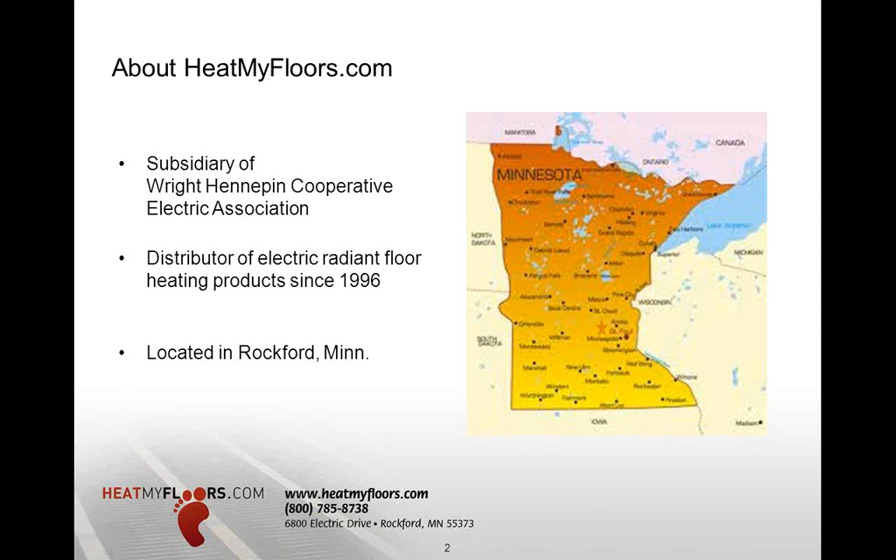A little bit about me. My name is Andy Hoffman. Some of my interests, I like to do a little snowboarding, biking, hunting, traveling. My girlfriend and I do a lot of traveling. I actually started with Wright Hennepin Electric in October of last year, so I'm fairly new, but my primary focus since I've been here has been specifically on this product for about the last 6 months or so.

So while I don't have quite the knowledge base that Dennis does, I feel pretty well versed in the product. And I didn't actually know it existed beforehand. I had done a lot of college jobs pouring concrete, roofing, some landscaping, things like that, so you see a lot of products out there. To come in here and see this STEP Warmfloor product is pretty unique, and I was pretty surprised there was something like this out there that existed. We see a lot of that at home shows too that we do. People come up to us and say they don't really know about it.

A little bit about the product, just to recap, or for some of you that aren't familiar with it: it's a low voltage, 24 volt AC or DC, semiconductor plastic radiant heating element. It's very reliable, comes with a 20-year warranty, 10 years on the transformers, and 2 on the controls. It's a self-regulating element, so it's very efficient, 2 times more efficient than cable, and even more efficient than hydronic systems. It's very thin and flexible. The widths come in either 12 inches or 9 inches, and the thickness is only 3/64 of an inch thick, which makes it ideal for remodels and retrofit applications, especially under carpet with its thin profile.

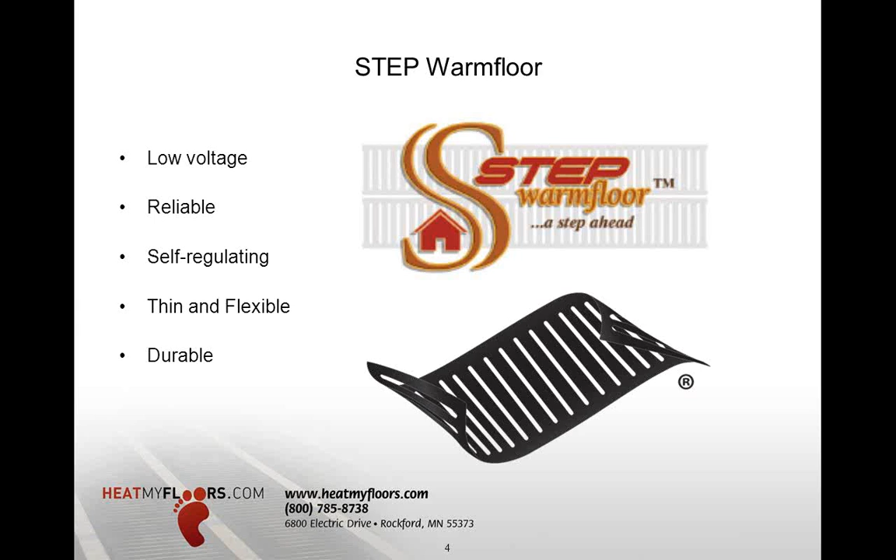And it's also very durable. You can nail and staple through the product without causing it to fail, and it has a lot of different applications, including snow melt, roof melt, primary or supplemental heat, things like that.

Taking a look at some comparison, STEP Warmfloor versus electric floor heating cables, which you typically find out there, you'll find that a lot of other products aren't going to be suitable under carpet. There's a lot of limitations with them, as far as floor temp goes, you'll typically want to get no hotter than 85 degrees, and a lot of those cable or radiant systems out there will get hotter than that because they're not covering as much area, so it takes a lot more energy to heat the same amount of space. And of course, you're going to run into that risk of overheating as well.

Typically we find carpet is going to be in a larger area, more likely a living room or a bedroom, and you're going to have large, heavy objects like dressers, couches, entertainment stands. When you put some of these heavier objects over those cable systems, they're obviously going to get a lot hotter than areas that don't have objects over them, and you have that potential for burnout. Where the STEP Warmfloor, because it does self-regulate, once it heats up to that 80, 82 degrees or so, it's physically not going to get any hotter than that. It can't, so we don't have any risk of that.

Also, with operating costs, if you look at putting cable in a larger system, you're going to find that it's usually quite expensive to operate. Where STEP Warmfloor, we typically say around 60 to 80 cents a square foot for the heating season, so it's very efficient as far as operating costs.

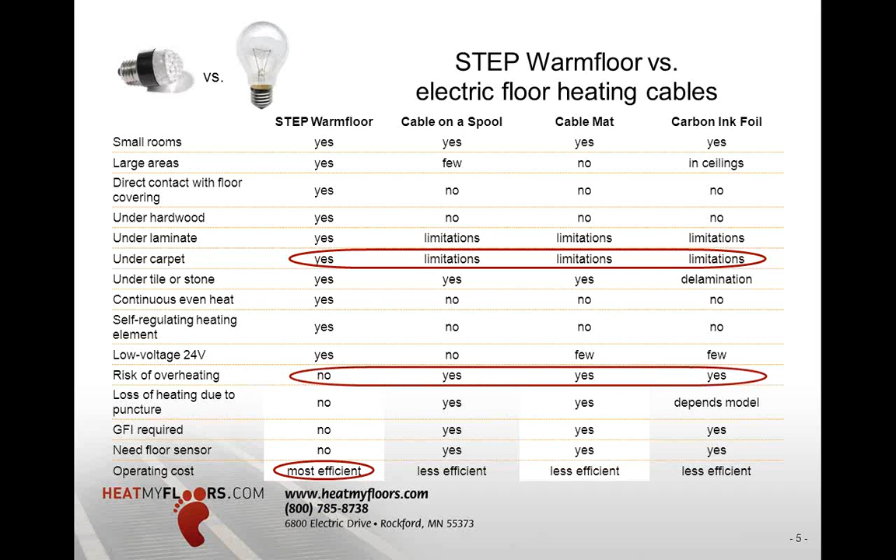Some notes on carpet here. It's naturally warm and acts as an insulator, so it's used a lot over concrete because concrete's naturally cool. To take that cool off the concrete floor, we see a lot of carpet go down, and it does help create efficiency for the house in general because it insulates. We've noticed that can cause problems on the radiant heating side of things, as far as preventing heat from coming through, so we're going to cover some different ways we can get around that.

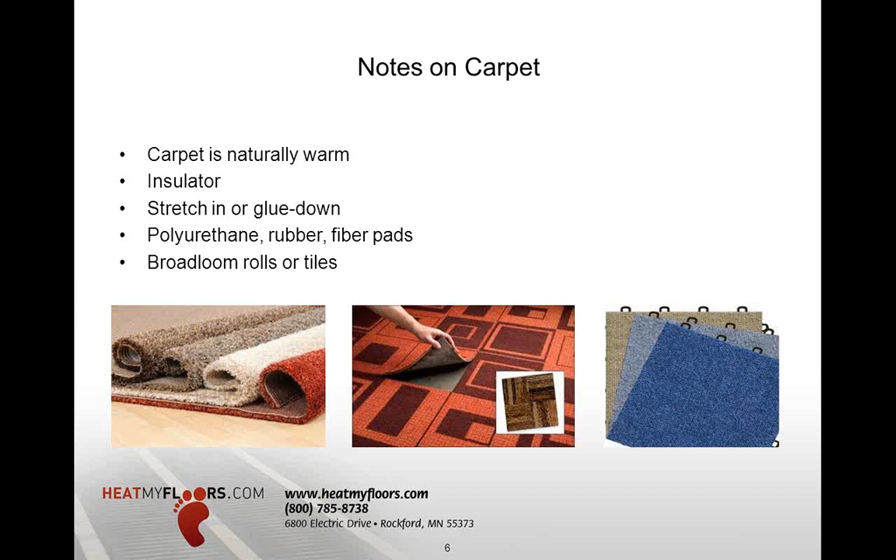One thing you've probably heard about with carpet is VOCs and off-gassing. VOC stands for volatile organic compounds, found in furniture, plastics, new cars, clothing, carpet. You can smell that new car smell, if you will - that's the chemicals evaporating from the material. Typically with carpet it's actually fairly low for off-gassing, but it's something to keep in mind.

Usually we see it decrease fairly significantly after several months, and you want to make sure you ventilate at least 72 hours after installation, and continue to ventilate for several weeks if you can - blowing fans around, or opening a window, things like that, to get some fresh air. Radiant systems can add to this effect - with the heat, evaporation can increase. So it's not a bad idea, after you get the carpet down, to let it sit and ventilate for a few days or a few hours before you fire up the system.

If you go with CRI, the Carpet and Rug Institute, they have a green label program where they label pads and carpets with this green label, signifying that the product is low in off-gassing or VOCs. So you want to keep an eye out for those.

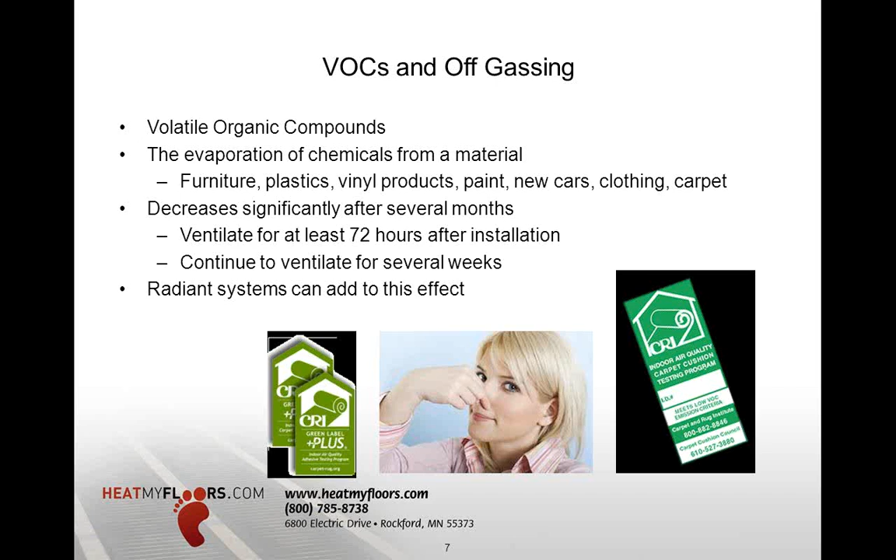Now, with selecting a proper pad or cushion - if we look at polyurethane pads, typically they come in three forms: prime, bonded, or froth. You'll want to stay away from prime or bonded pads. You'll see a lot of bonded pads out there - they're the most common. But what you'll find is they have higher R values, with a lot of air and glue in them, and over time, once those pads wear down, they really just become an insulation barrier preventing heat from passing through. Froth is regarded as one of the better pads in the industry, even outside of radiant heat comparisons.

Froth does a nice job of laterally dispersing the heat. It's got a nice density and is higher quality, which typically lasts longer too. That allows for even wider spacing of the elements as well, because it has that nice density where it disperses the heat outwards.

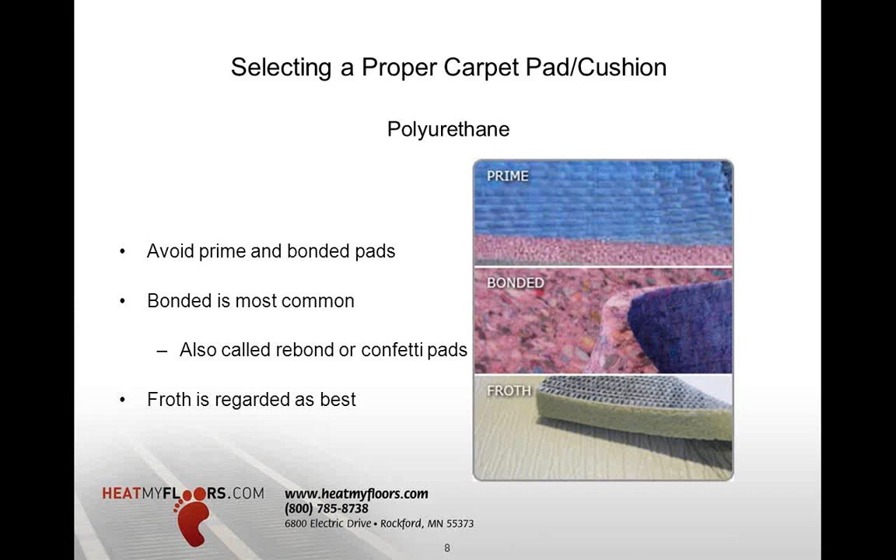Another type: slab rubber and waffle pads out there. Typically we find slab works better than waffled, and that has to do with the contact the elements can make with the pad. With waffle pads, you're going to have a lot of air in there that acts as a natural insulator and prevents some of that heat from radiating through, whereas the more contact we can have with the element to the pad, the better the system is going to perform.

Typically we want to say thinner is better in general for that. If you do find a pad, we're always looking for lower R values, and that will create tighter spacing of the elements, because typically with a lower R value, it's not going to disperse the heat as well. So while it's nice to have that, you still need some sort of mass to disperse that heat and get it in direct contact with the elements.

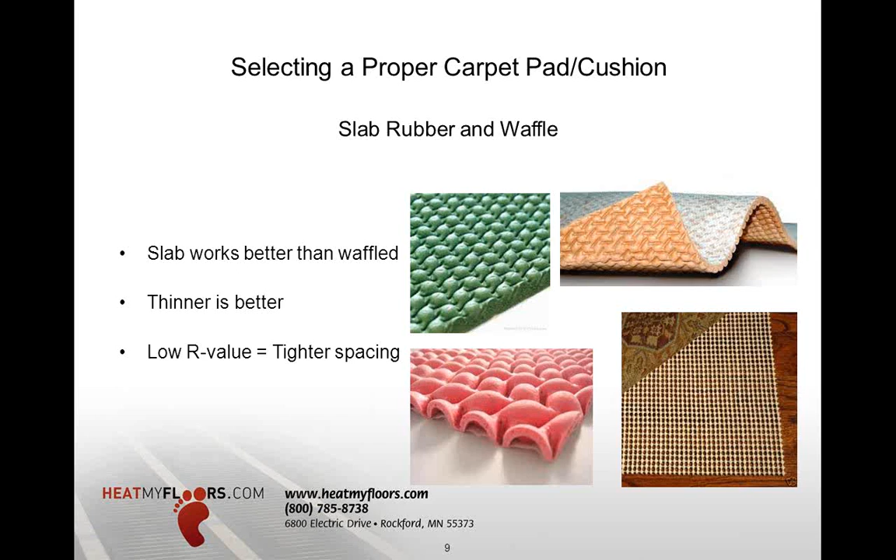However, on the flip side of that, because it is so thin and lacks that density, if you do look at putting the system embedded in cement, thin set, or self-leveler, you would actually want to consider the fiber pad, because it has that thinness, that low density, low R value that you're looking for. So typically, if you do some research on radiant heat, as a lot of systems are embedded in cement, they will actually recommend fiber pads.

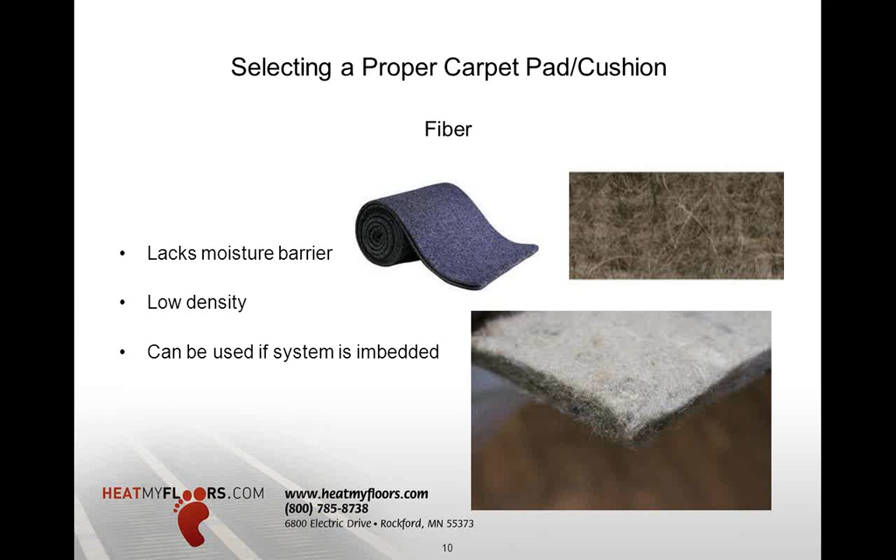But for STEP Warmfloor, you will want to avoid them, as we are looking for a moisture barrier. You can see from that image up there, if you spill something on a pad without that moisture barrier, it's going to go right down to the subfloor, which is typically where we're going to have those STEP Warmfloor elements. So if you spill a pop or have a pet accident, things that leak through, once you heat some of that, it's probably not going to smell the best.

And you always have the potential for shorting out the elements, which is okay - you might trip a breaker, things like that. Once it dries, go kick it back on. But just in general, you'll always want to look for that moisture barrier if you're not embedding the elements.

You also want to look for that low R value and a higher density pad, and consider the thickness you're working with and what kind of room you have. Chart below is just a quick rundown of some of the typical pads you want to look at, some of the R values and thickness there. Obviously, the thinner and the lower R value you can get, the better off you're going to be with that.

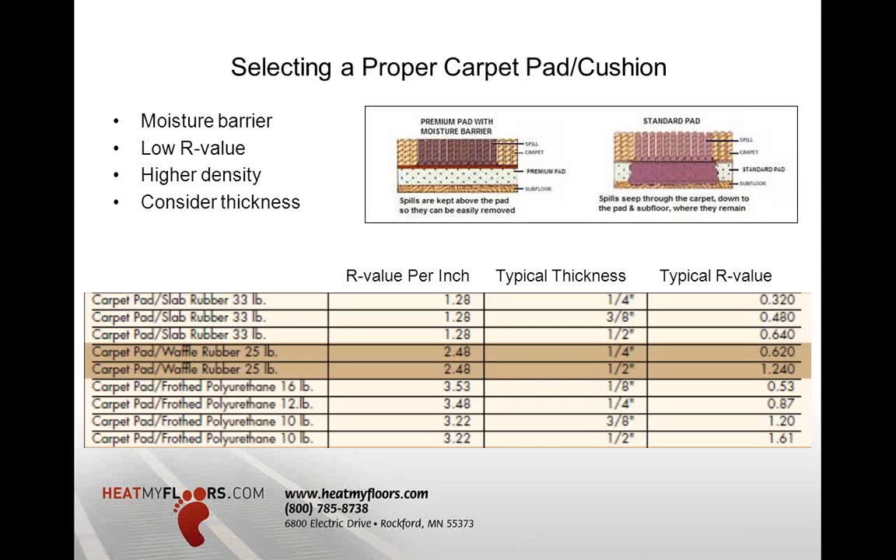So what we recommend, as far as the manufacturer recommends, Healthier Choice and Sponge Cushion are two brands - we'll go into those coming up here too. But you want to look for rubber-backed pads, that moisture barrier again, and froth pads as well. Those always do real well, and look for low VOCs and off-gassing.

What you will want to avoid is that prime or the bonded or rebond polyurethane pads. One thing I forgot to mention with those pads as well, a lot of those bonded pads do have adhesives in them, and over time that can be detrimental to the STEP Warmfloor element, cause it not to perform as well.

Of course, you want to avoid pads with the higher R value. The fiber pads, we kind of went over that, and obviously anything with a high VOC content and off-gassing. The main thing is just to always check with your retailer or manufacturer to make sure that the pad and the carpet you choose are rated for radiant. If you don't know, or if they don't know, feel free to get in touch with us. If we don't know, we'll find the answer.

We'll find it out for you. But that's really the main thing, is to just make sure what you're using is rated for radiant. Most of them are, but there are some out there that aren't.

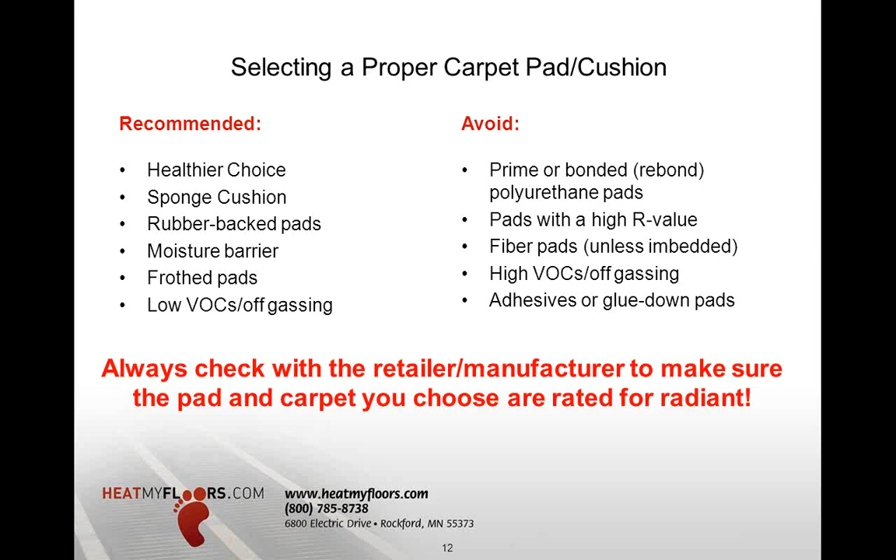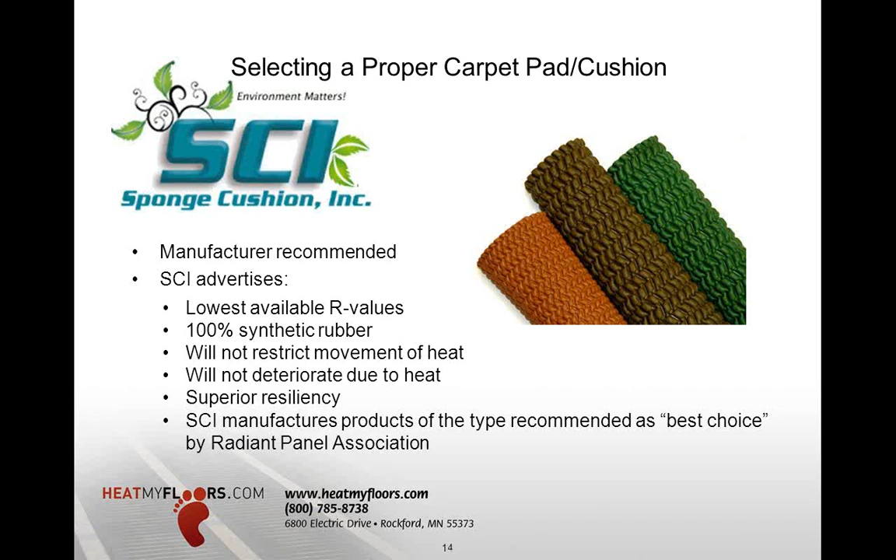The other one, Sponge Cushion, is manufacturer recommended, and they advertise right on their website. They have the lowest available R values that you can find. These are 100% synthetic rubber, and also do a nice job of dispersing the heat. And you'll find the RPA, the Radiant Panel Association, does recommend typically these rubber pads to be the best choice to use over radiant floors.

So when you're looking at carpeting, you'll want to also think thin with this as well. Combining the carpet and the pad, you'll want to be under an R value of 2.5 if you can. If you combine the R value of the pad on top of the R value of the carpet, it's always nice to be below that mark. And if you are looking for a thicker carpet, it might be nice to consider a thinner pad, or vice versa. If you're going to have a thinner carpet, you can go with that thicker pad.

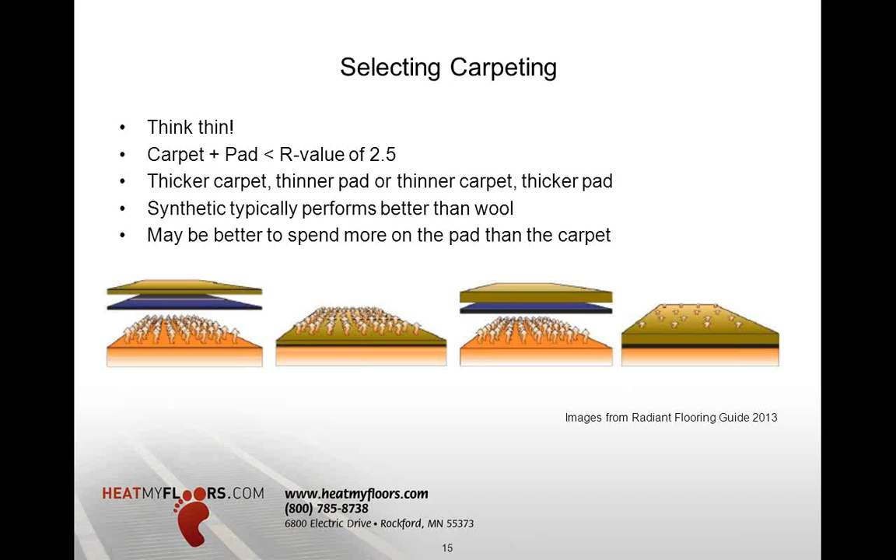And you can see by the diagram there, the thinner obviously is going to let a lot more radiant heat pass through it than that thicker stuff, which will insulate the heat and keep it from passing through. Typically we find synthetic will perform better than wool. Wool's that natural insulator, again, with the higher R values. And in some cases it may be better to spend more on the carpet pad itself than the carpet, because really that is going to be what's in direct contact with the heating elements, and you're going to really rely on that to disperse that heat.

So jump to insulation. It's especially important to insulate if you can with carpet applications, because carpet is that natural insulator. So if you don't put down some sort of insulation, you're going to find that the system might not perform to what your customer's expecting, and you're also going to lose a lot of efficiency on the system as well. A common misconception out there is that heat rises. Well, it doesn't. It moves to cold. Hot air rises. So it's always important, especially if you're going on top of a concrete slab, to get down some sort of insulation, so you don't have that slab drawing all the heat down through it.

And this is another thing too you find with a lot of cable systems. They'll become very inefficient if they're just put on the slab, whether it be STEP Warmfloor or the cable, because of that heat sink that can develop. And if you're looking at a slab on grade, you'll also want to consider insulating the perimeter as well. It's just as important, even more so than below grade. You can see in the pictures below a couple examples there.

Basement, they put down some polystyrene, it looks like, and then they'll put the elements down and pour the floor over that. If you do have a crawl space you can get to, some spray foam insulation there. And then otherwise, if you have an unfinished basement and you're putting this STEP Warmfloor down on the main level, and you can insulate between the joists, absolutely do that also.

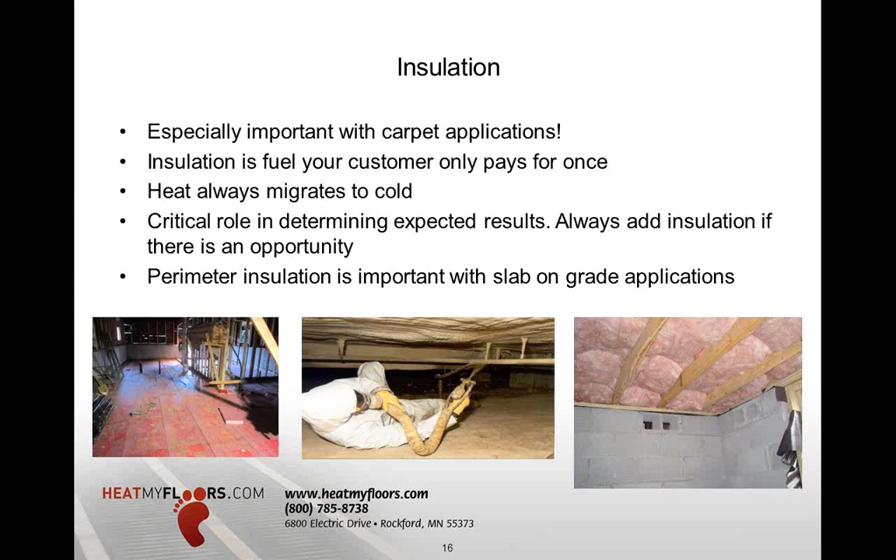So if you can't get beneath the floor and you have to go right on top of that subfloor, there are a couple different products out there you can look at: cork, polystyrene, artificial or synthetic cork, and what you'll want to do is avoid foils from coming in contact with the elements. It will cause it to short out, and the system will not work well with those. And same with polystyrene. It's sometimes difficult. It's usually a lot thicker than cork or the artificial or synthetic cork. But if you have the height room for it, absolutely, the greater R value you can get, the better it's going to perform.

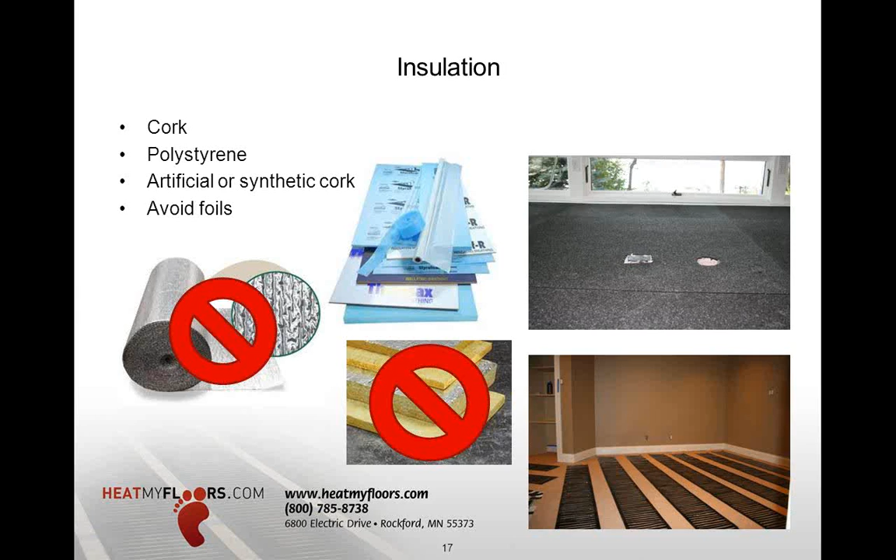A product we carry is called Cerazorb. It comes in a 4x4 sheet, and it's 3/16 of an inch thick, so it's very thin. It's only 5 pounds a sheet, very lightweight as well. It's very easy to work with. It's pretty flexible, and you can cut it to the areas that you need. And it comes with an adhesive back; you just peel it off and stick it right to the subfloor. And this is another product that can actually be used under laminate or engineered wood, as well as carpet over concrete slabs. And you can install the carpet tack right over the Cerazorb product.

And one thing too, to help you with the height, not so much the product itself, but the connections and the wiring, is you can notch into your insulation product, create a little valley to run those wires, and keep it off the edges of the room if you want as well, where you can run your leads in that valley where you don't have the insulation.

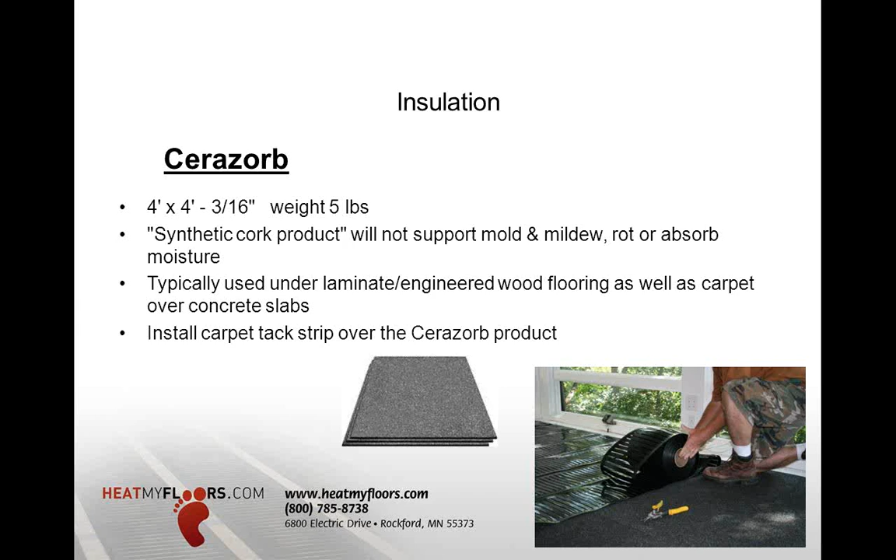So when you're looking at installing the elements, typical spacing under carpet is going to be about 5 to 7 inches, but you can go down to 1-inch spacing if it's needed for a heat loss requirement. The max we'll want to go under carpet is going to be 8 inches, and that's really pushing it. You really have to have the right setup for that. Otherwise, you'll find you're going to feel the cold striping. You'll feel where the elements are and they aren't under the carpet pad there.

And typically we'll use the EP-30-2-24W. That's the 7.8 watt a foot product. That one will only heat up to the 82 degree mark, which is right where we want it under carpet. If we are looking to do a primary heating system and the heat loss does require more watts than what that 7.8 watt product can put out, we can use the 9 watt element in there as well, but typically we don't find ourselves having to do that.

And with the wiring, you always want to fail-safe wire it whenever the elements are not embedded in a thin set or a self-leveler or a lightweight concrete, things like that. And we'll give you everything you need as well as far as putting down the elements. All our designs are custom to fit the room. You'll know how many feet of element you need, where you need it, how to space it, and how to wire it. So you'll cut the lengths that you need, lay them out, and then wire them accordingly.

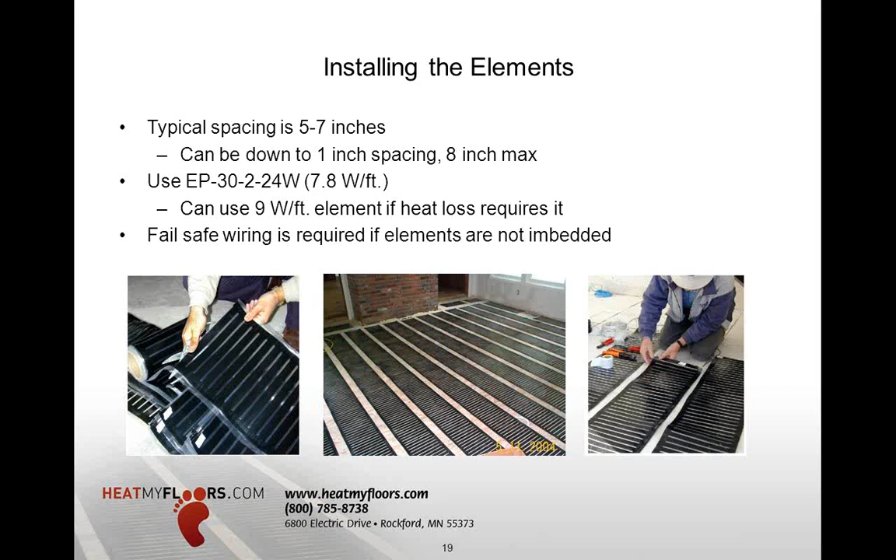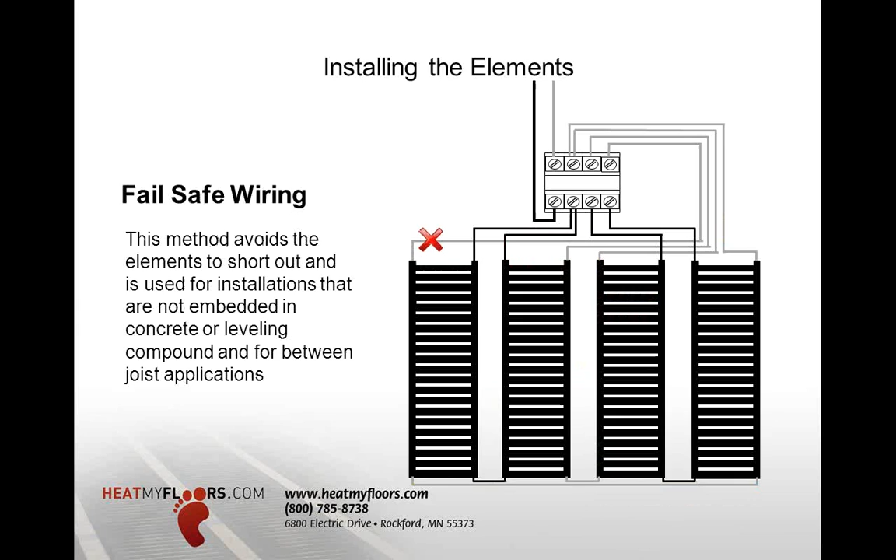And with the fail-safe wiring, it's going to prevent the elements from shorting out. And like I said, it's always used when we're not embedding the elements in some sort of self-leveler or thin set. And going back to that too, I forgot to mention, if you are going to embed the elements, you can just use the standard parallel wiring and just have the one lead go back to the transformer, and that will work also.

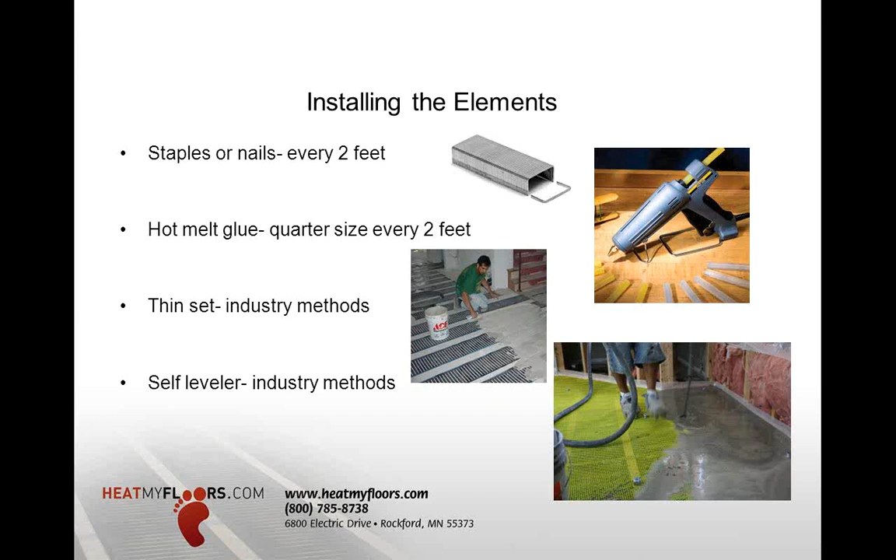As far as securing the elements down, the easiest way probably to do it is just to staple it right to the subfloor or even to the insulation product with a staple gun, or even nail it every 2 feet or so to get it to lay flat. If you don't have that option, you can always use a hot glue gun, hot melt glue, and just do a little quarter size every 2 feet or so, just to keep that element down as well. Or if you're going to thin set or do the self-leveler, just follow the industry standards on that. Put down your insulation, put the elements down, and then thin set or self-level right over the top of that.

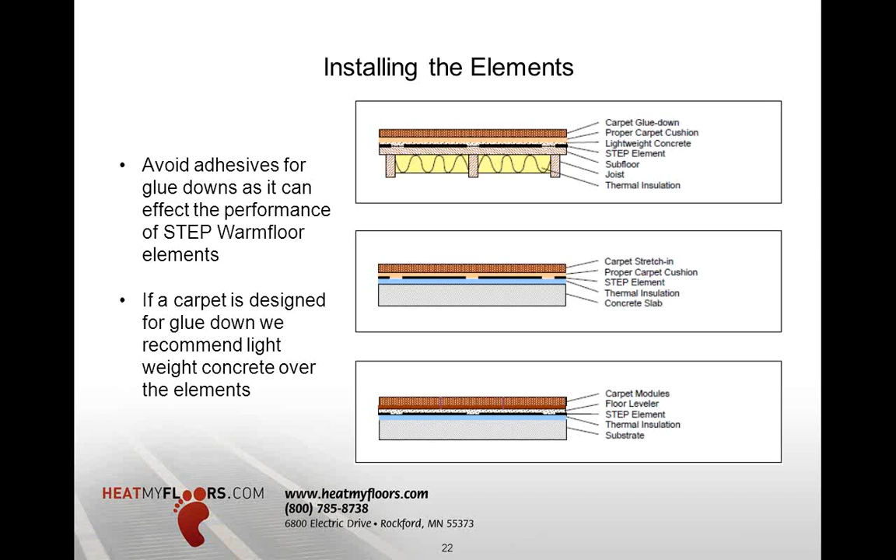So here's some different diagrams as far as the layers of flooring, how they can be applied. Again, you'll always want to avoid adhesives for glue-down applications, as it's going to affect the performance of the STEP Warmfloor elements. We want to make sure no adhesives or metals come in contact with the elements. So you can see the top application, they were able to insulate below, and then you have the element in some lightweight concrete, and then you do your cushion and then your glue-down pad. If you aren't doing a glue-down, just doing the stretch-in, you can go straight to putting down your insulation, the elements, and then go with the pad and carpet right over the top of it. And then the bottom diagram there shows, if you're going to work with carpet tiles, kind of the same deal. You'll want to embed those elements right in a thin set or self-leveler.

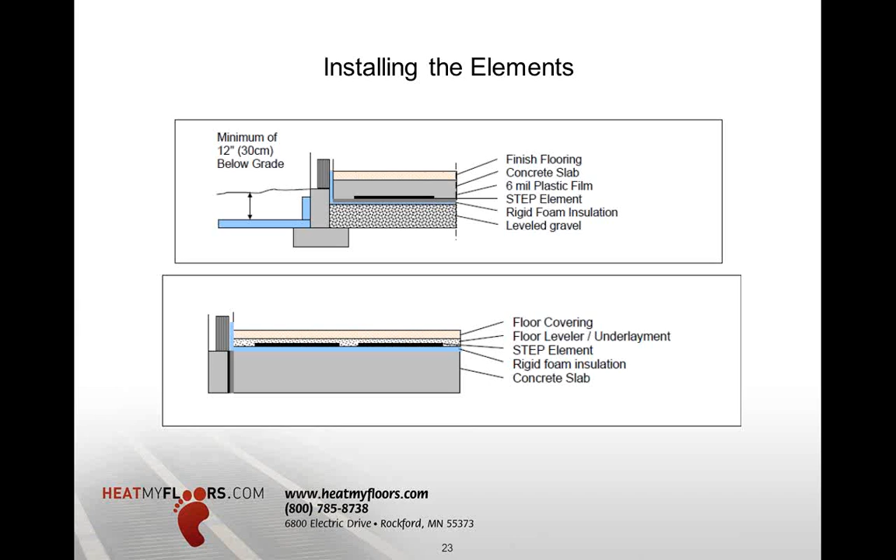Also, as I mentioned, we do like to have some sort of mass to heat up. You're really going to feel that striping effect if you do go that route and put the elements above the carpet pad, because the carpet itself isn't going to do a good job of dispersing that heat. So you'll really be able to feel where that heat isn't if you go between the pad and the carpet.

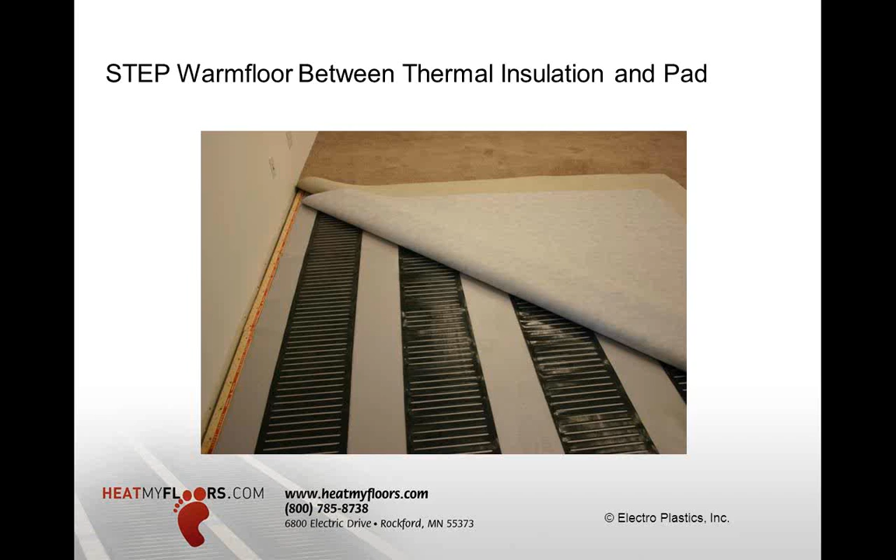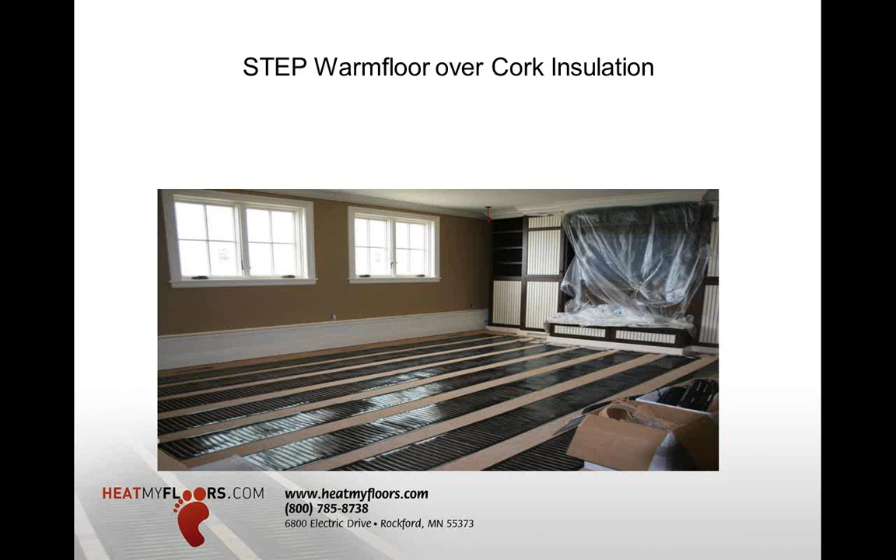And then just to give you another example here, the basement. They have the cork insulation down and the elements spaced out there, all wired up, and then you can see they went with the carpet right over the top of that there.

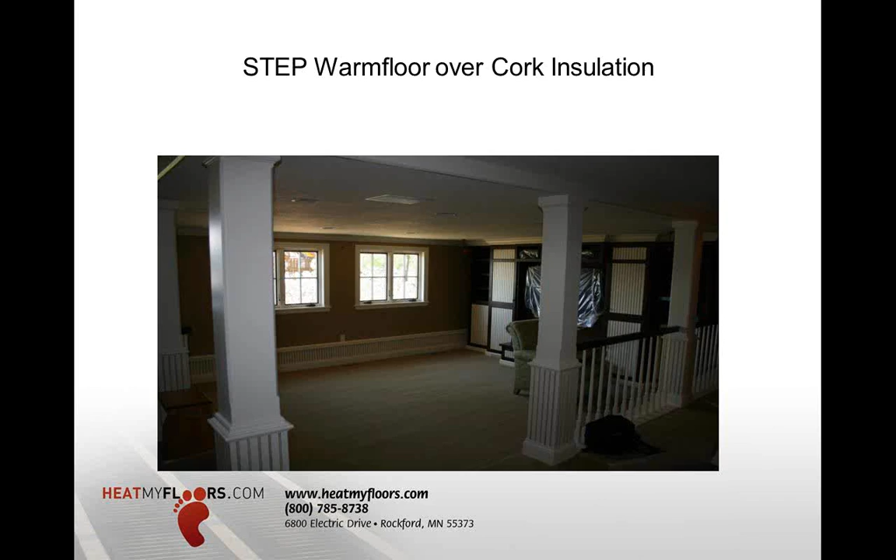As far as the carpet installation goes, really you're just going to prep the floor and install according to industry standards. Again, you want to make sure you open up those windows and ventilate real well to take care of some of that VOC and off-gassing. And you always want to test the system before and after the installation is completed, just to make sure nothing shorted out in it, things like that. And like I said, it doesn't hurt to let that carpet ventilate a good few hours before you fire up the elements, or even a few days.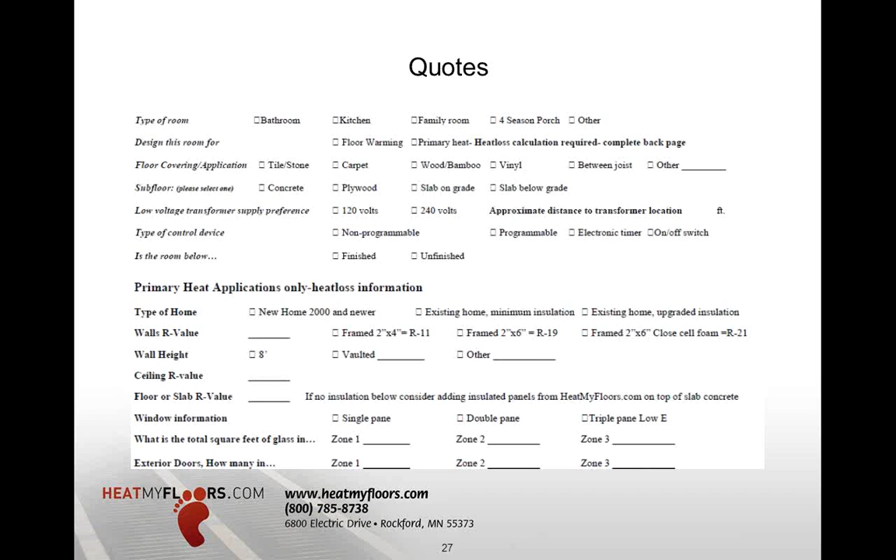With the quotes also, probably the most important aspect of the quote is the floor plan, the layout. And it doesn't have to be the best or to scale or necessarily exact. What's important for us is most of the dimensions on there, and we'll get you a CAD layout of exactly how to lay out the elements. Like I said, how to space them, how to wire them up, how far away we can be, what elements are going to be wired into each other, things like that.

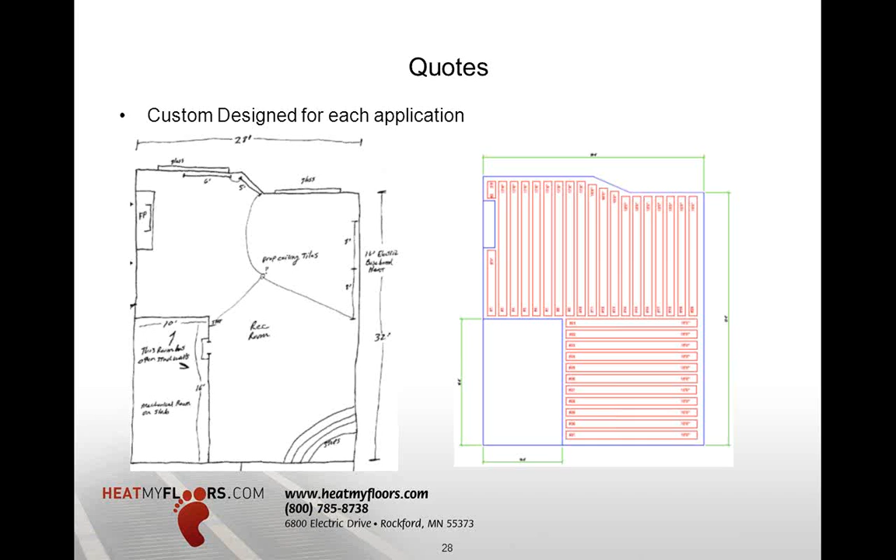And what also helps us with the drawing is obviously we don't need to heat every square foot of the floor. You can see in this example here there's a fireplace on the wall. The square in the corner there, that room, was a utility or mechanical room, so obviously we didn't need heat in there. So when you're sending in your drawings, just make sure you always indicate where exactly you want the heat. Or if you're going to have a large object that's not going to move, we don't need to heat under that. Same thing in a kitchen, you have cabinets, obviously don't need to heat around that, so we can work around those objects for you.

As far as resources go, some great places to look: the Radiant Flooring Guide, a new one came out recently for 2013. You can find that right online. Google it. It's just a magazine, and you can get the PDF and save that. It is free.

The EPA is another good one. You can find a lot on off-gassing, health aspects, things like that there. And same with the Carpet and Rug Institute. They're going to let you know kind of what products and things like that will work better under or over radiant floors. And then the RPA as well is another good resource.

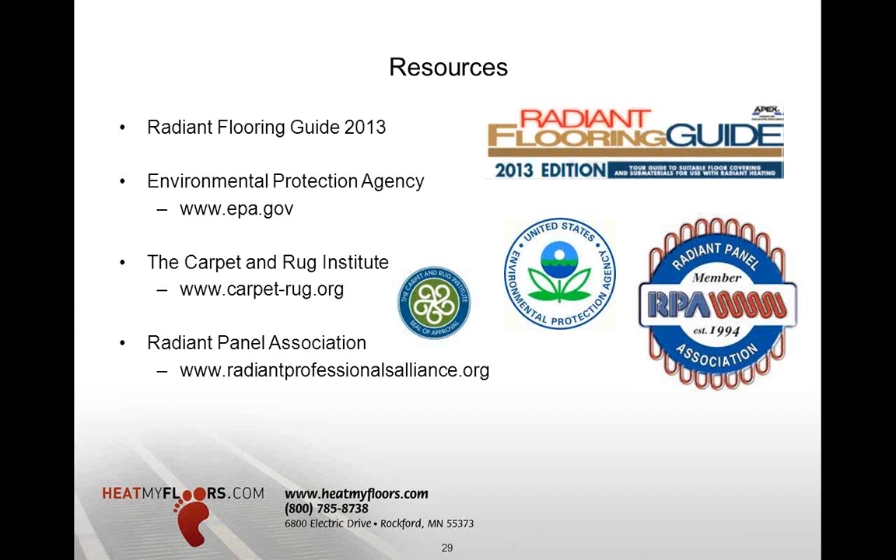So coming up, we have Steve Wallstead's going to be presenting next. He is going to be covering tile applications there. There's a large variety of different ways the element can go under tile, including in showers, wet areas, things like that.

And then we have Tracy after that is going to be presenting on staple up applications. And we get that question a lot. We see people at shows. Not only are they fascinated that they could put the product under carpet, but also with the staple up applications.

We have a lot of people that did their bathroom, and at the time they didn't have enough money to heat the floors, or they didn't want to do the radiant system, and now they have this nice tile floor, but it's cold. But they have that unfinished basement and access to the joists. Well, we can look at stapling up the elements right to the subfloor there, and then that's another one where insulation is going to be key on driving that heat upwards through the floor.